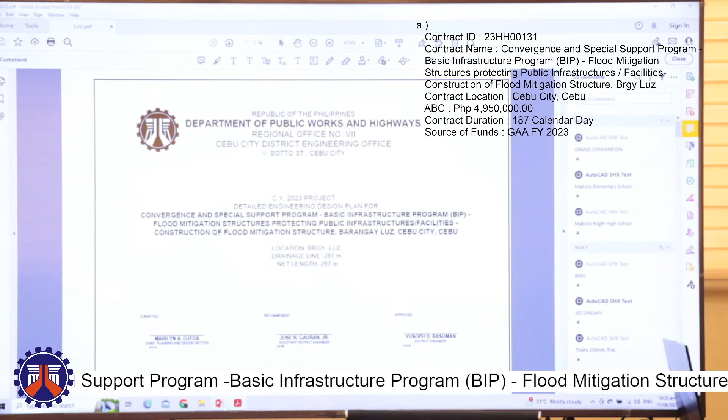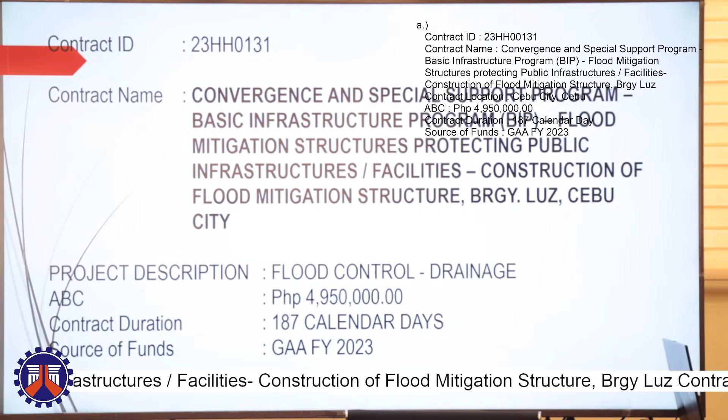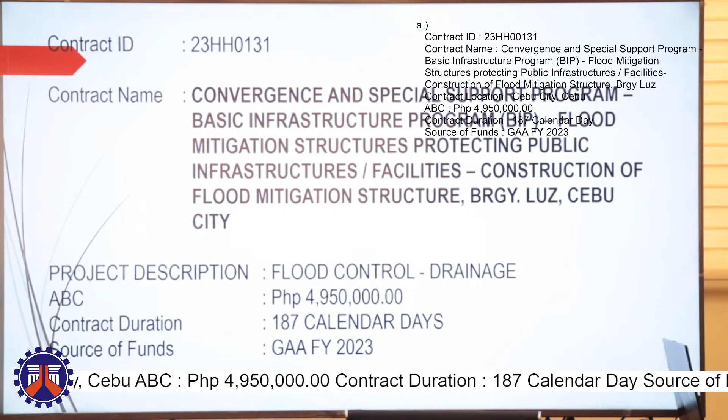Good morning everyone. For contract ID 23HH0131, contract name Convergence and Special Support Program, Basic Infrastructure Program, Flood Mitigation Structures, Protecting Public Infrastructures, Facilities, Construction of Flood Mitigation Structure, Barangay Luz, Cebu City. ABC for project description, flood control drainage, ABC amount 4,950,000. Contract duration 187 calendar days.

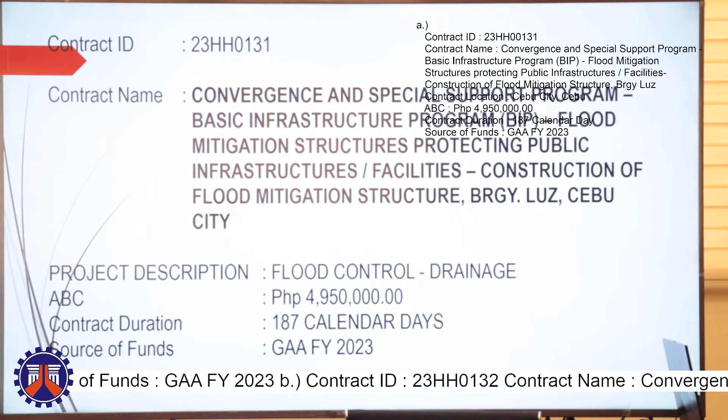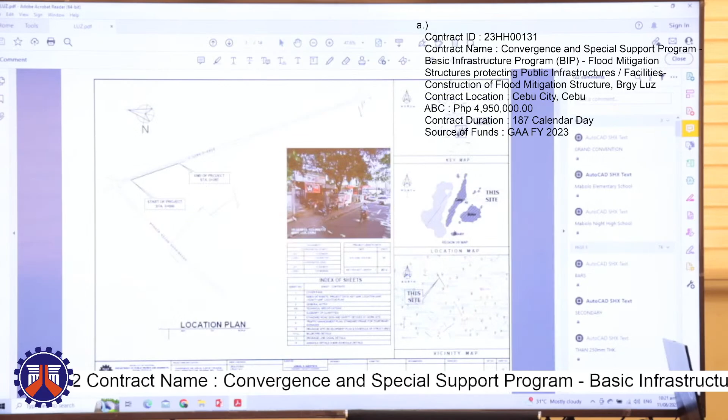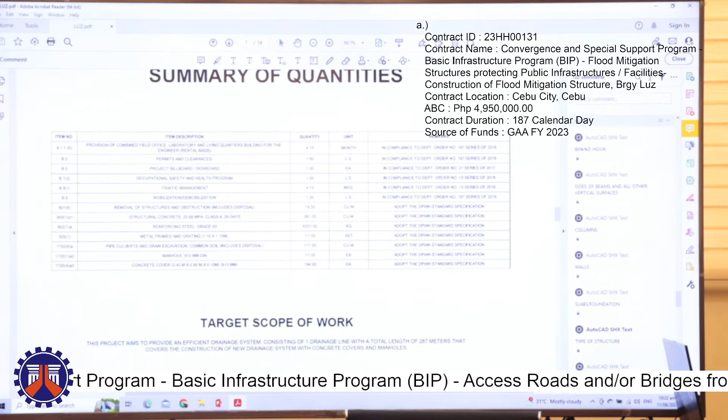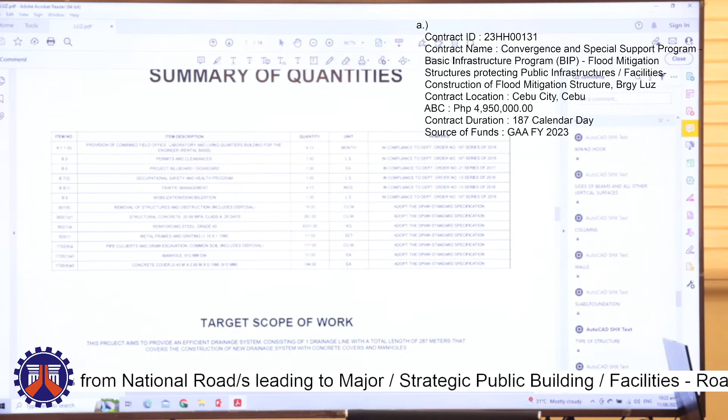For the design, detailed engineering design, for the summary of quantities: item A.1.1, provision of combined field office, 4.13 months. B3, permits and clearances, 1 lump sum. B5, project billboard/signboard, 1 each. B.7, occupational safety and health program, 1 lump sum. B.81, traffic management, 4.13 months. B9, mobilization/demobilization, 1 lump sum.

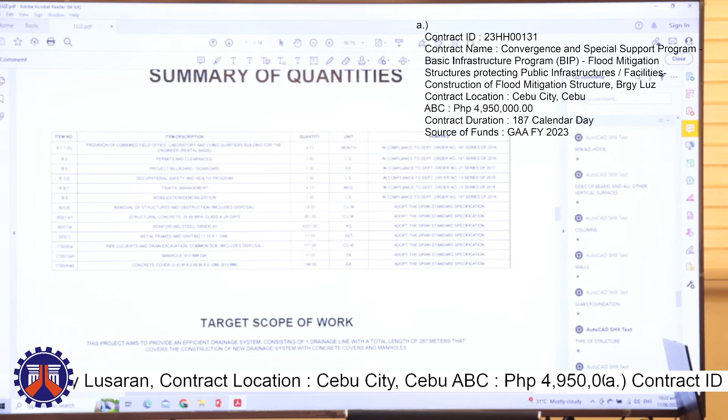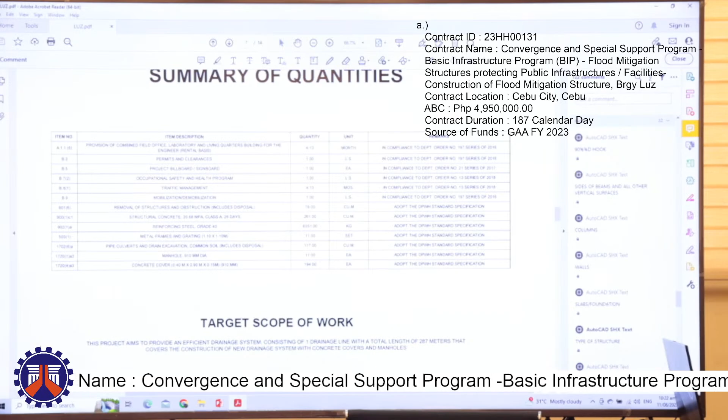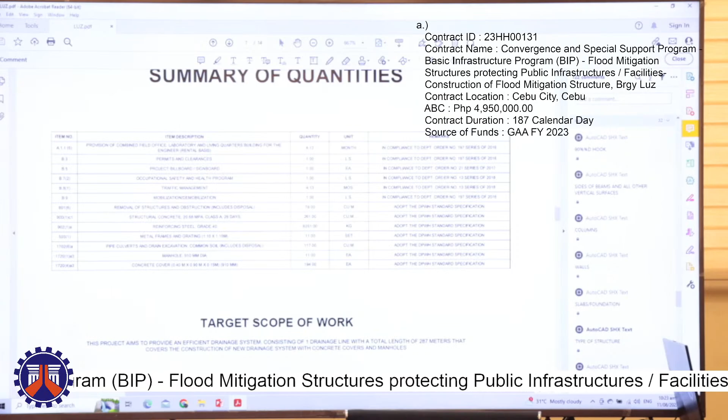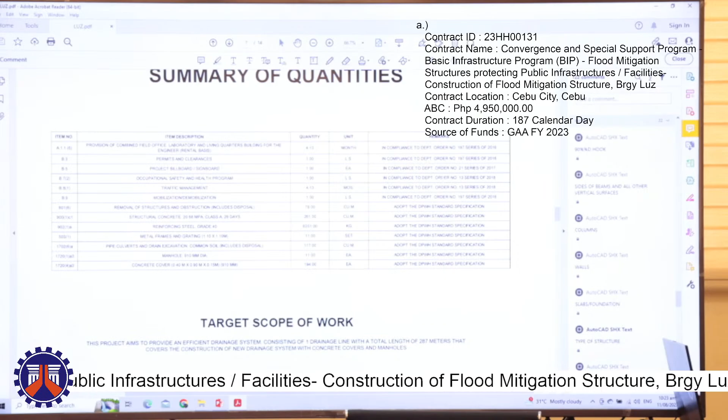8016, removal of structures and obstruction including disposal, 79 cubic meters. 901 C1, structural concrete 20.68 MPa Class A, 28 days, 261 cubic meters. 902 1A, reinforcing steel grade 40, 6,351 kilograms. 503, metal frames and grating, 1.1 by 1.1 meters, 11 sets. 17026A, pipe culverts and drain excavation, common soil, 117 cubic meters. 1721A3, manhole 910 mm diameter, 11 each. 1724A3, concrete cover dimension 0.4 by 0.9 by 0.15, 910 mm, 194 each.

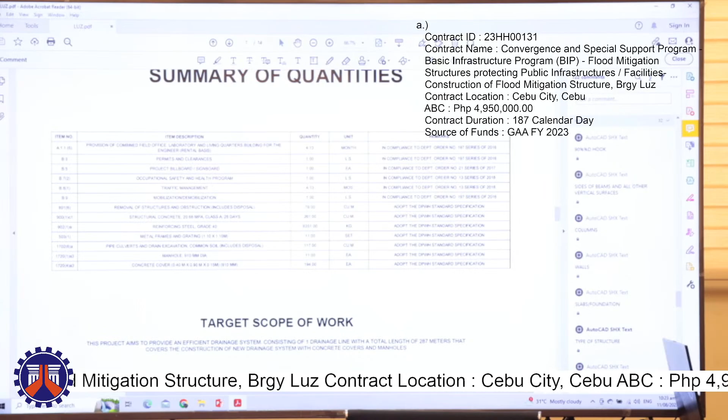For the target scope of work, this project aims to provide an efficient drainage system consisting of one drainage line with a total length of 287 meters that covers the construction of a new drainage system with concrete covers and manholes.

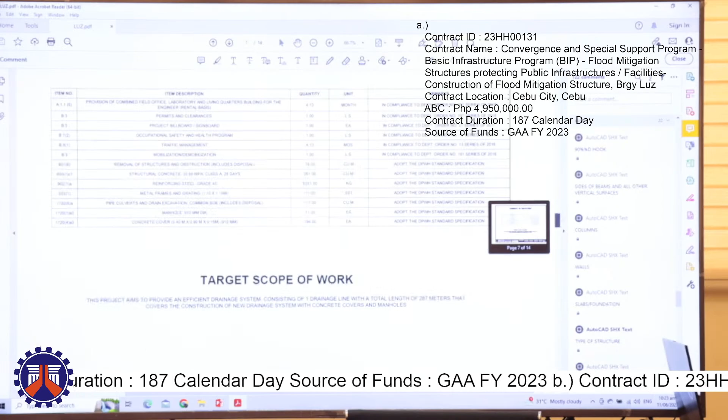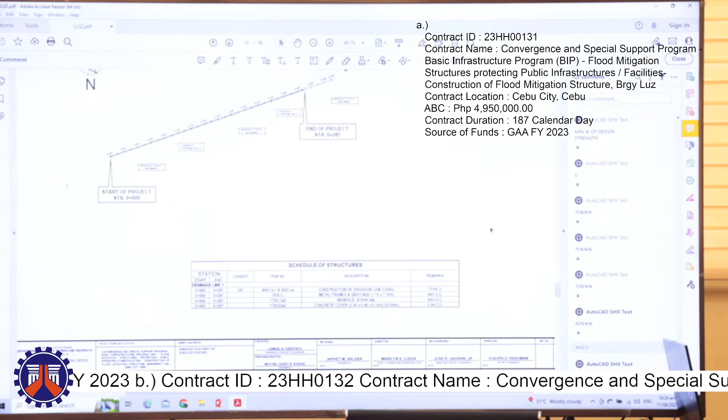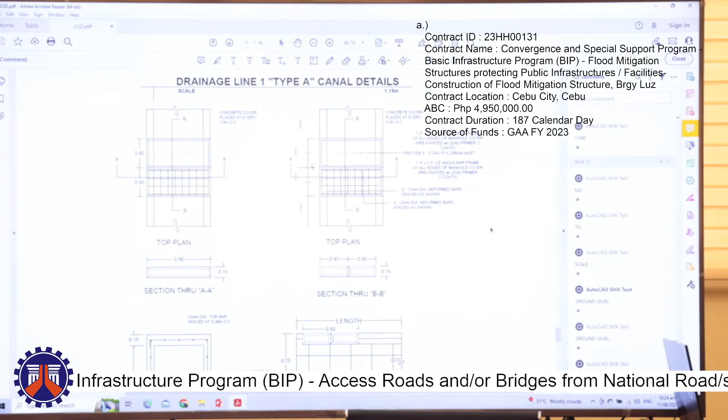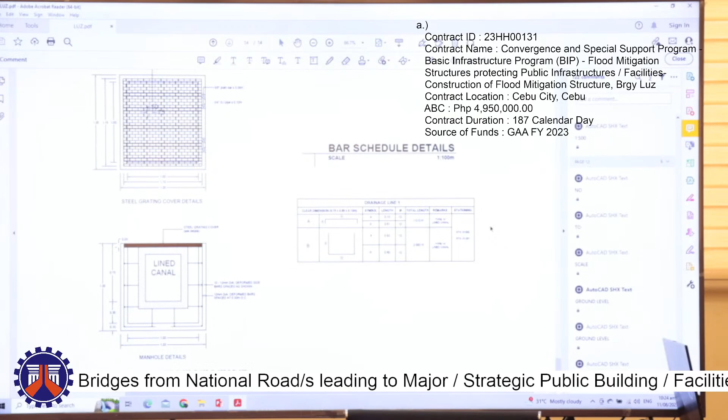For the location, this is near the previous project in Barangay Luz, going down. For the typical section, 0.8 design invert and 0.7 for the clear width. The thickness of the drainage is 0.1. Dimension of concrete cover is 0.4 by 0.9 and the thickness is 0.15. For the manhole, the total depth will be 1.2 and the total width is 1.2, with corresponding stationing.

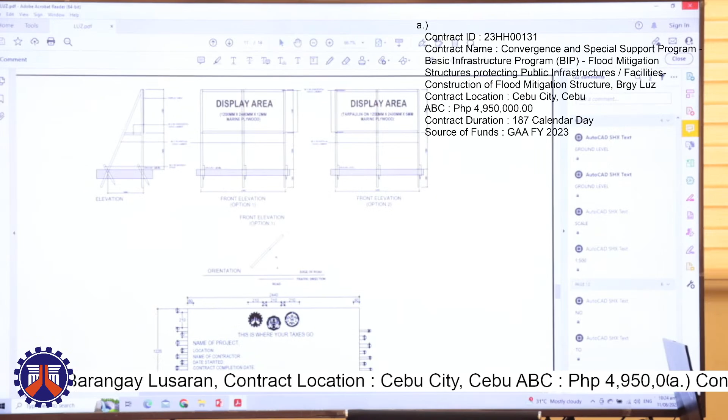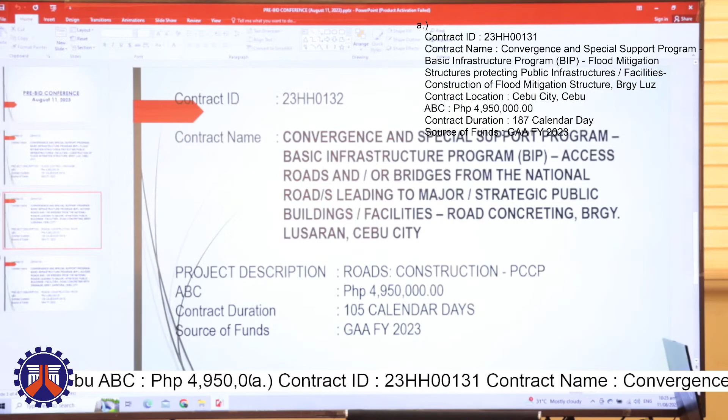And for this will be the bar schedule details. So that will be all for Barangay Luz. Next is for the roads, will be discussed by Engineer JC. Thank you.

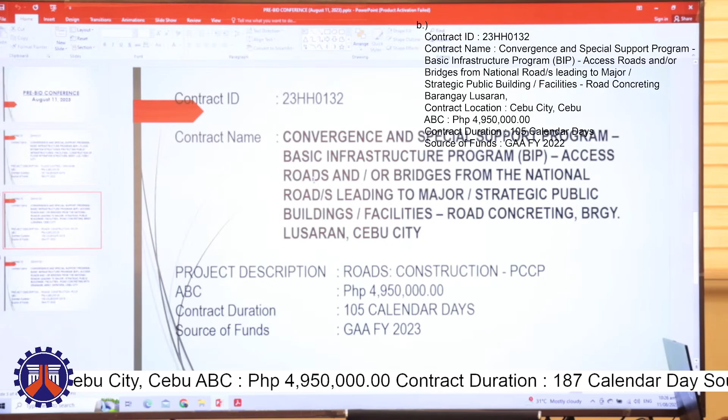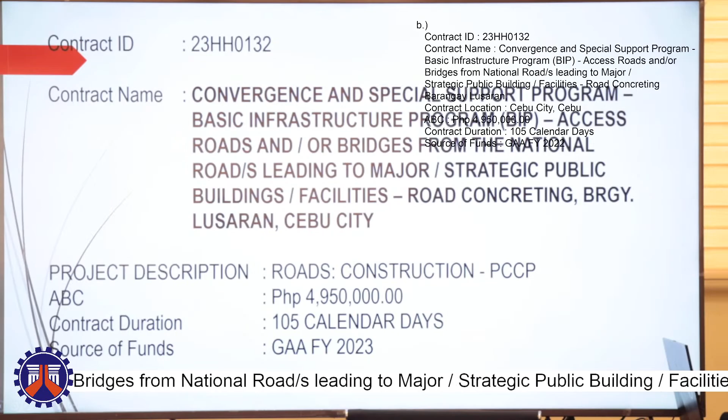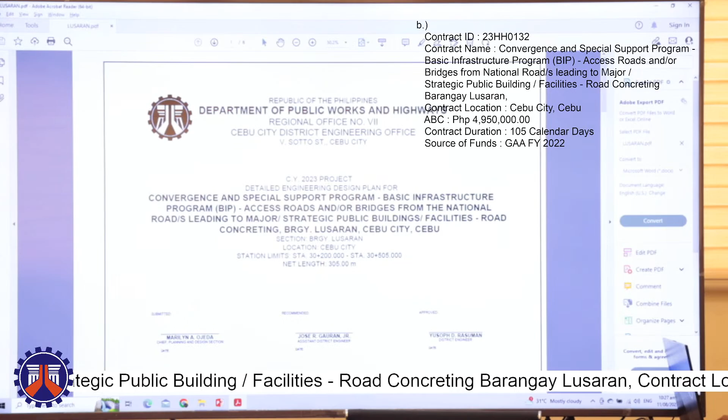Good morning. The next project is 23HH0132 with contract name Convergence and Special Support Program, Basic Infrastructure Program, access roads and or bridges from the national road leading to major strategic public building facilities. Road concreting, Barangay Lusaran, Cebu City. ABC is 4,950,000 with contract duration of 105 days. For the DED plan, the project station limits are 30 plus 200 to 30 plus 505, with net length 305.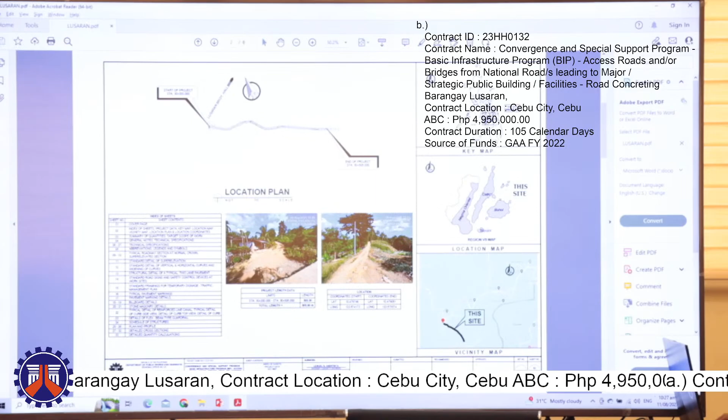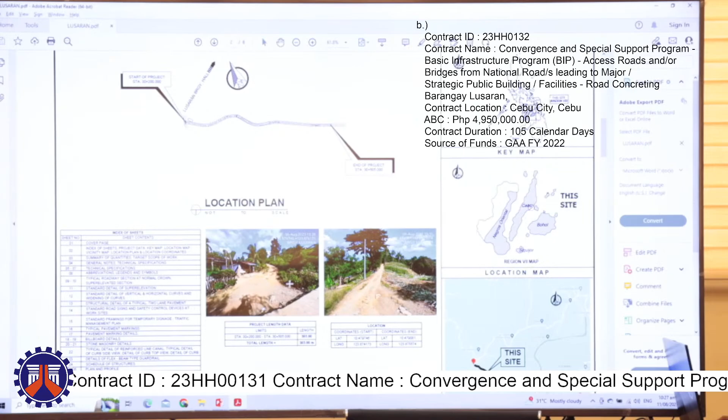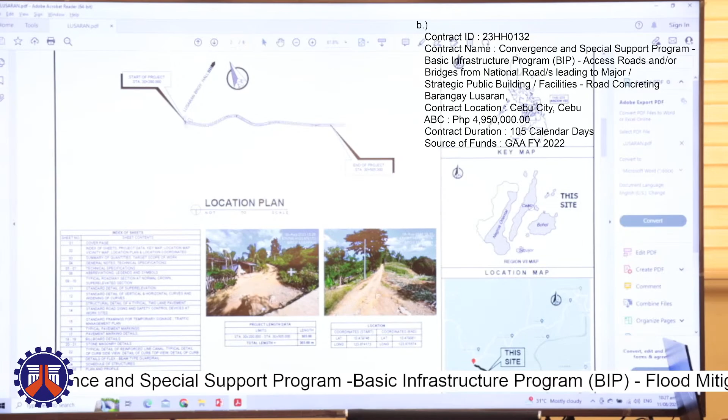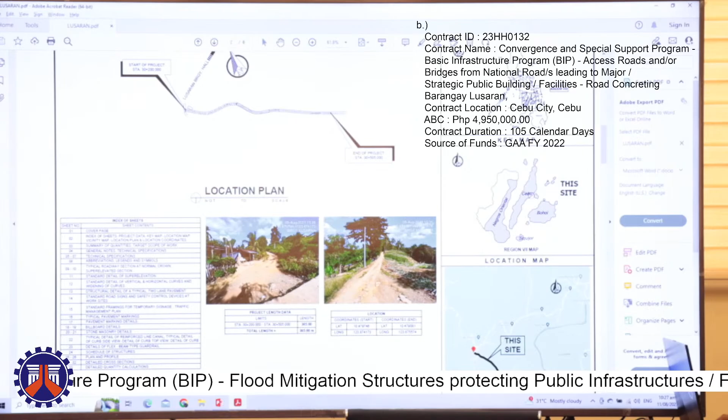So here is the location of the project site. And as you can see here, this is the actual photo of the site. It is a branch out of the previous 2022 project. So the location, you can search it on Google Map. Here are the coordinates, the start and the end.

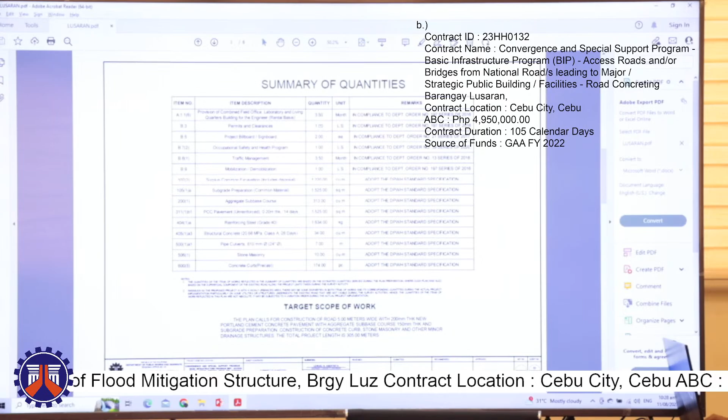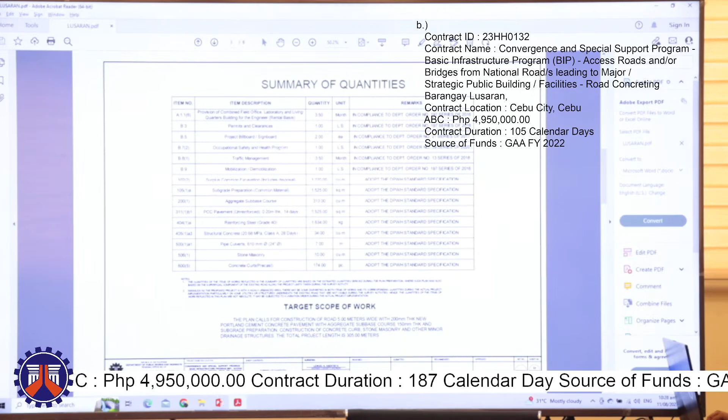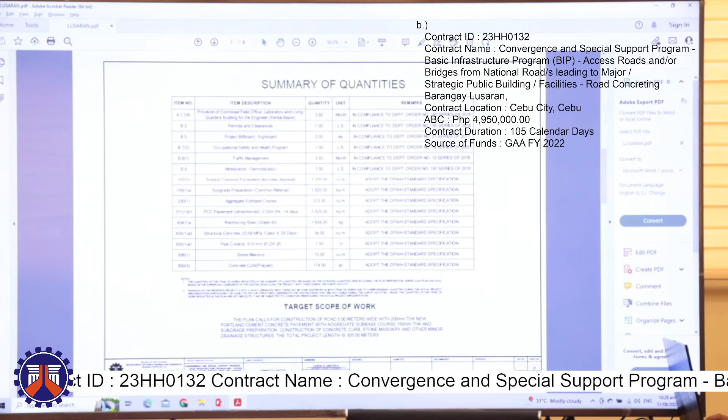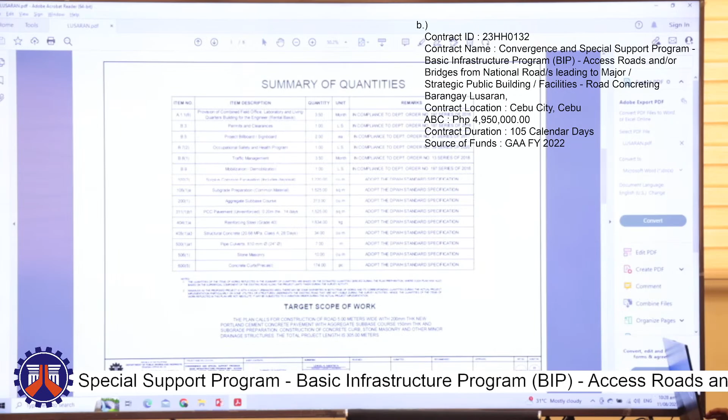So for the summary of quantities, there is provision of combined field office, laboratory, and living quarters building for the engineer, permits and clearances, project billboard/signboard, occupational safety and health program, traffic management, mobilization/demobilization, and surplus common excavation with 1,220 cubic meters, subgrade preparation, aggregate subbase course 313 cubic meters, PCCP pavement unreinforced 0.20 meters thick, 1,525 square meters, reinforcing steel, structural concrete for the line canal, pipe culverts 610, stone masonry, and concrete curb precast.

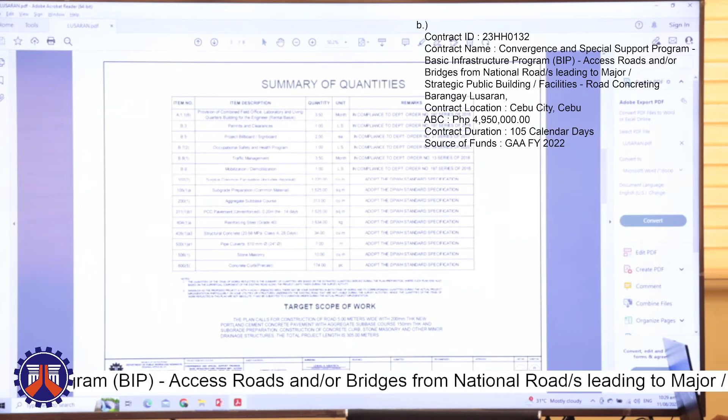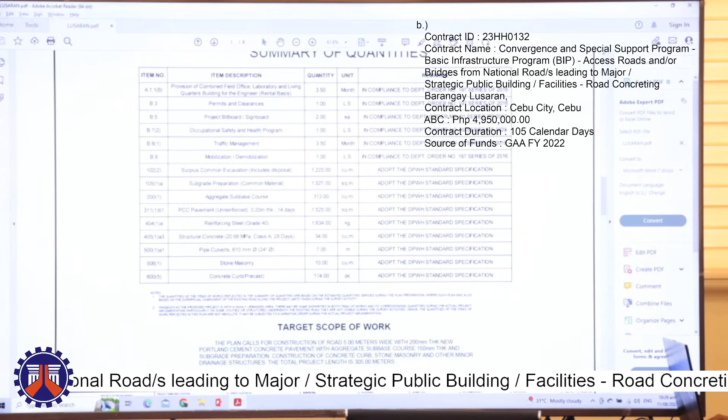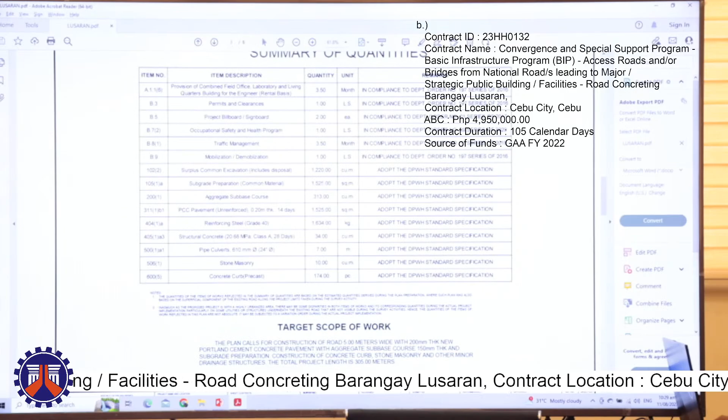For the target scope of work, the plan calls for construction of a road 5 meters wide with 200 millimeter thick new Portland cement concrete pavement, with aggregate subbase course 150 millimeter thick and subgrade preparation. Construction of concrete curb, stone masonry, and other minor drainage structures. The total project length is 305 meters.

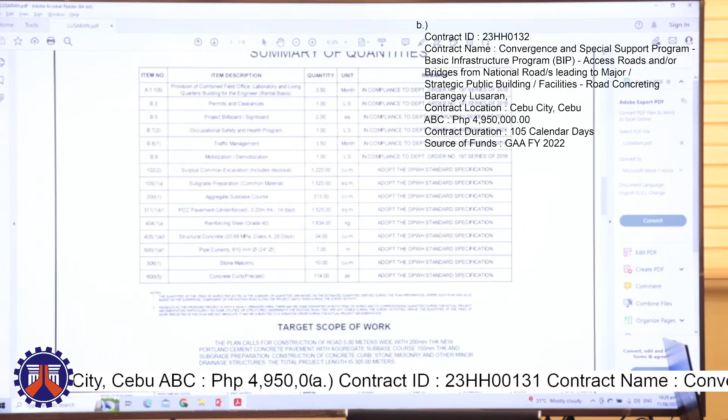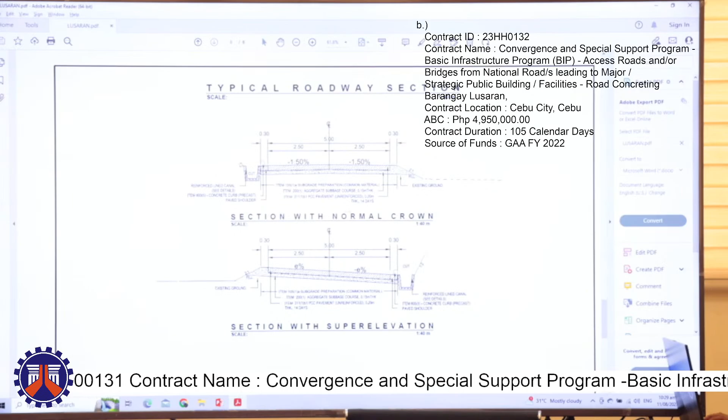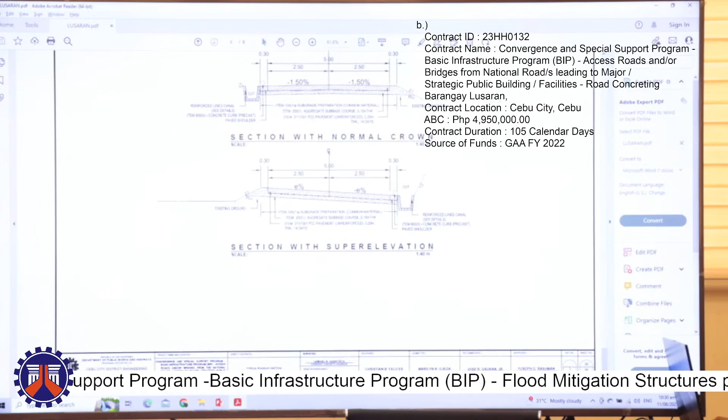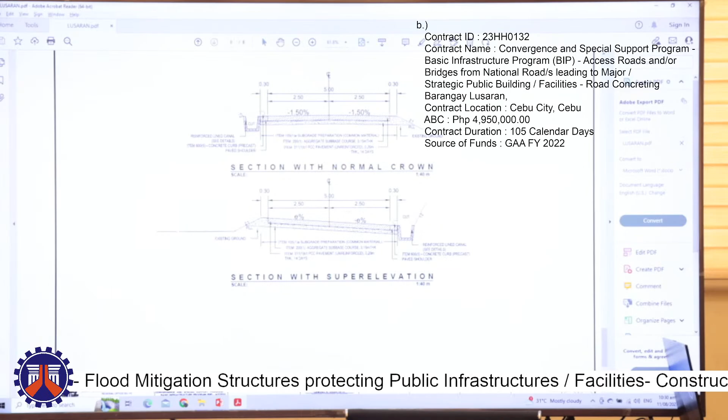So for the typical cross section, this is the typical cross section of the project: section with normal crown and the section with super elevation. So I think that's it for the Barangay Lusaran project, 23HH0132. Thank you.

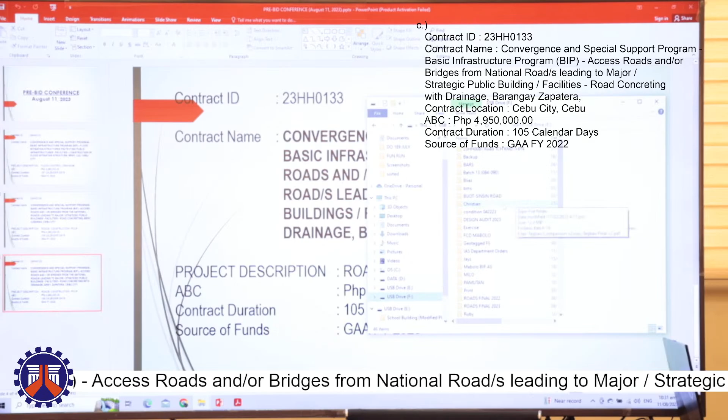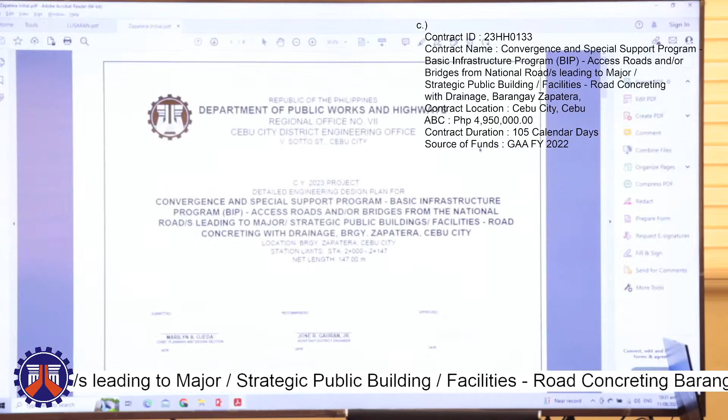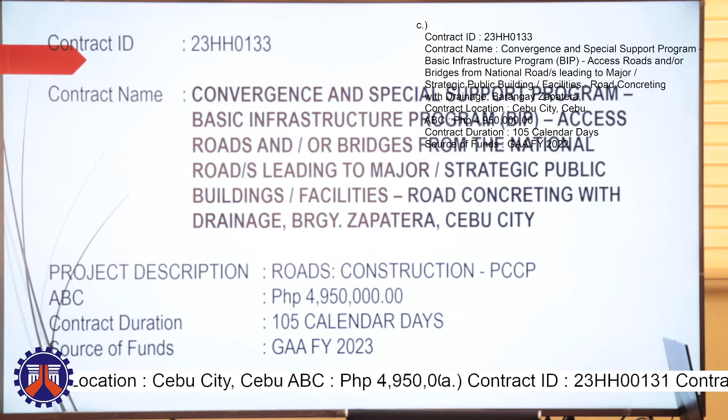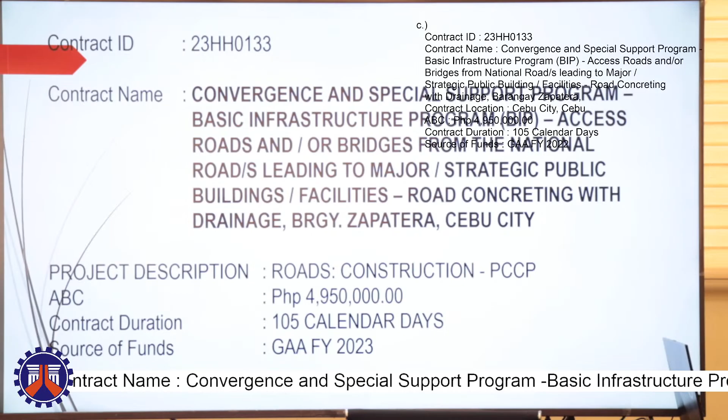Morning, everyone. I will be discussing the contract ID 23HH0133, Convergence and Special Support Program, Basic Infrastructure Program, access roads and/or bridges from the national roads leading to major strategic public buildings and facilities, road concreting with drainage, Barangay Zapatera, Cebu City, with an ABC of 4,950,000 and a duration of 105 calendar days.

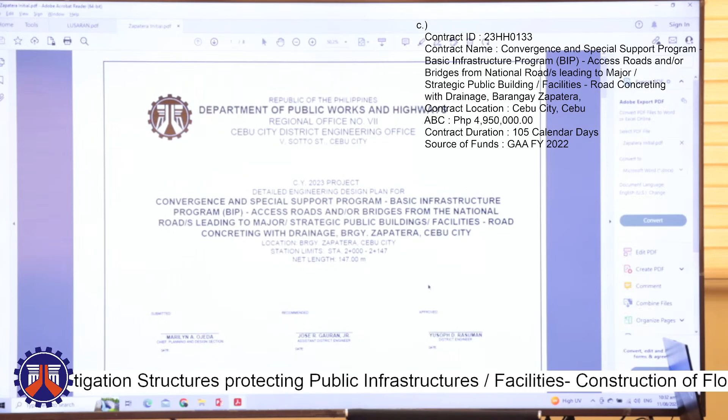For the DED of this project, we have the station limits, Station 2+000 up to 2+147, with a net length of 147 meters.

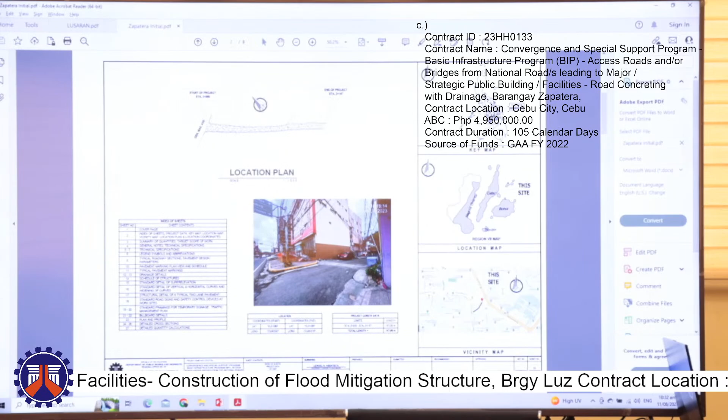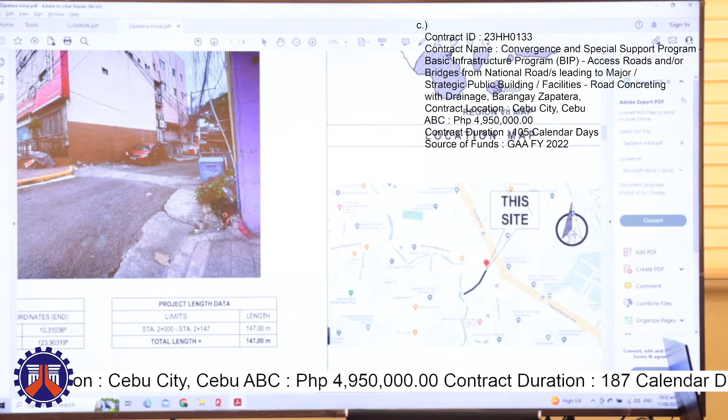For the location of the project, we have it here somewhere near the Dole, and near Mango, Genmax, and Gorordo. So we provided here the coordinates for the project location.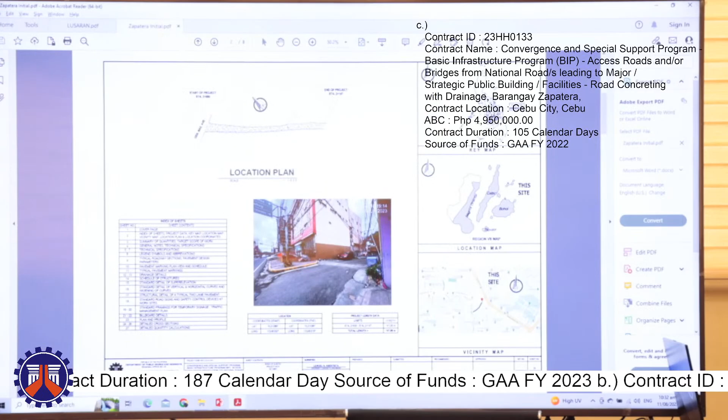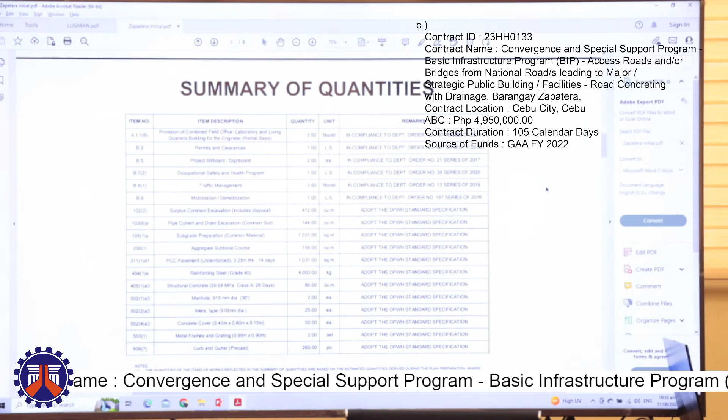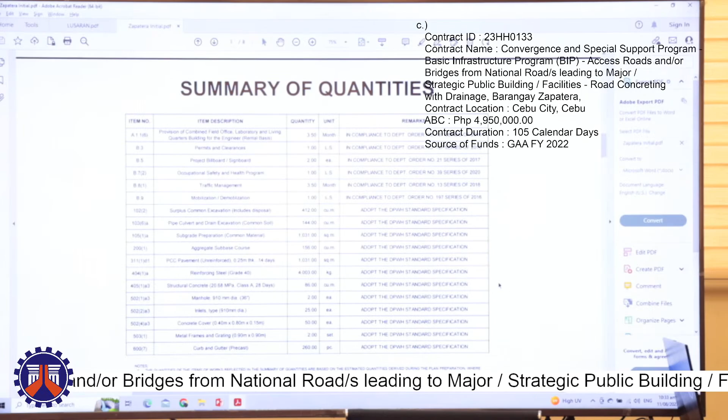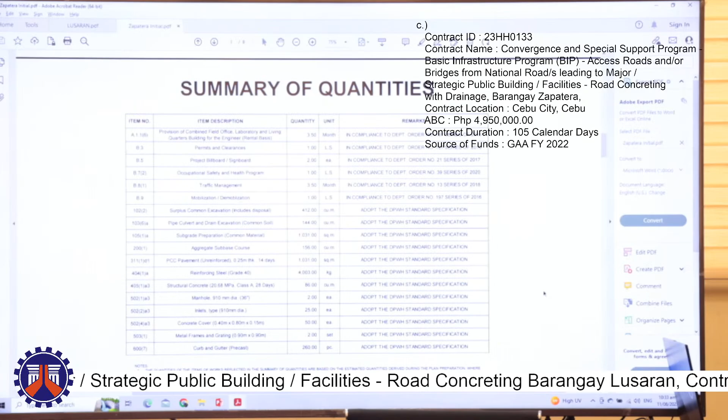For the summary of quantities, we have here provision of combined field office, laboratory, and living quarters building for the engineer, permits and clearances, project billboard, signboard, occupational safety and health program, traffic management, mobilization, demobilization, surplus common excavation, pipe culvert and drain excavation, subgrade preparation, aggregate sub-base course, PCCP of 0.25 thick 14 days curing, reinforcing steel grade 40, structural concrete 20.68 MPa Class A 28 days, manhole, inlets, concrete cover, metal frames and grating, and curb and gutter precast.

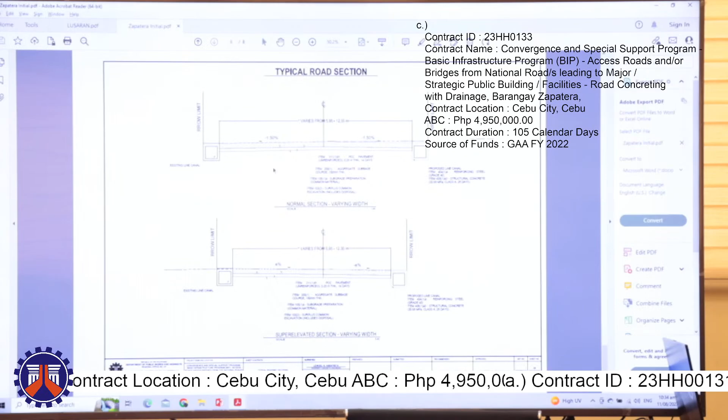For the typical cross-section of this project, we have here the PCCP of 0.25 thickness, and then we have the reinforced line canal for both sides. So that's all for this project.